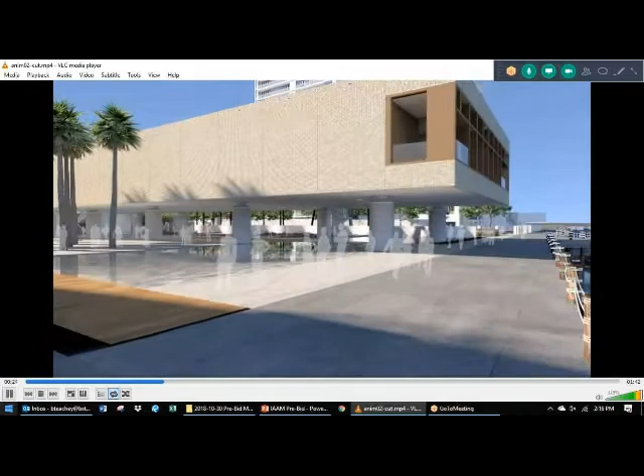You have the marina that's here. You're sitting upstairs right now in the Charleston Maritime Center. What you'll have is your basic walkway where we keep everything where it's at. A lot of the landscape is a little different from this animation, it changed just a little bit when we did the final permit drawing. But you're talking about your reflecting pools that are here as a walkway that goes in.

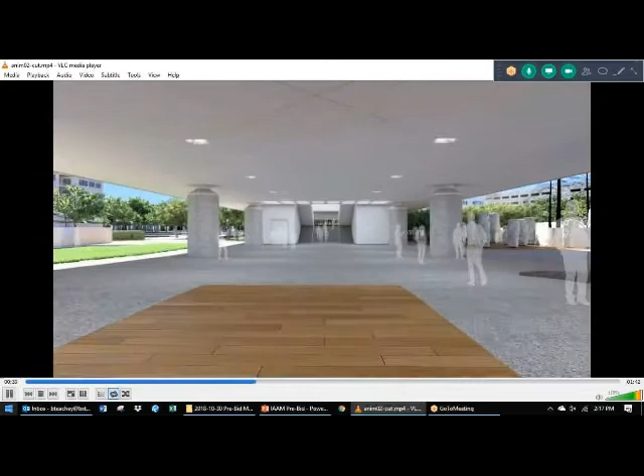Ignore a little bit of this wood bamboo, it's not down there - that changed a little bit from the animation. But your concrete finish, your tabby columns are out there.

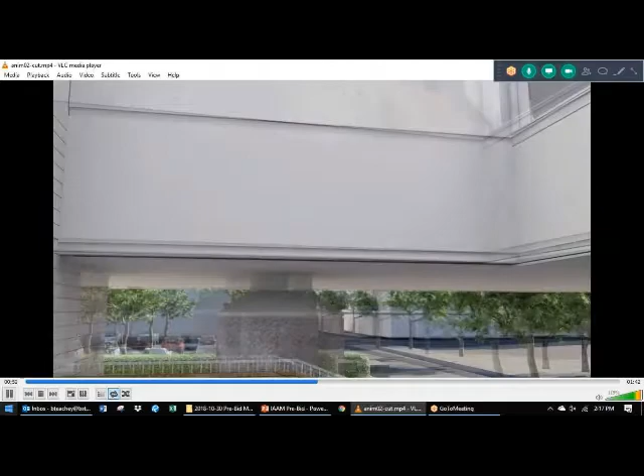So we're sitting on about, what are we, like 290 some piles? 292, that was off by 2. 292 piles. And then up here, we're on 18 columns that it sits on.

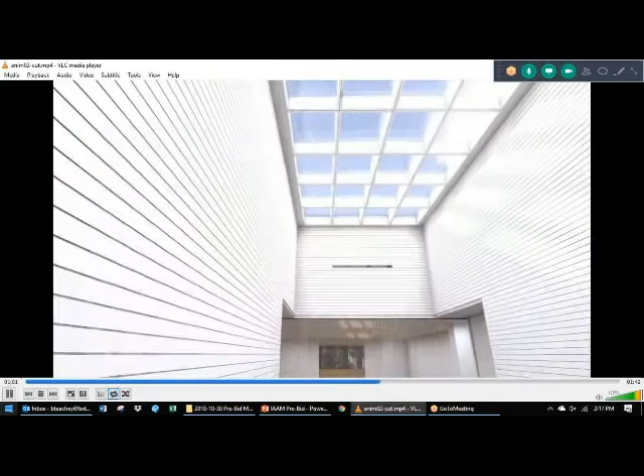It kind of goes up from level 0 into level 1, where you'll have your double rotating doors that go into the main lobby of the area. A lot of your wood all the way through here is in that entrance area as you come up. Then to show a little bit of the animation that comes back out, you see a little bit of the landscape on the sides.

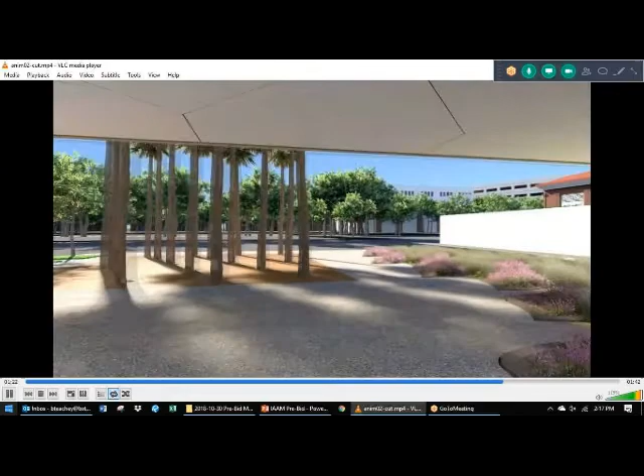And again, your concrete pavers come all the way out, right on back out to the street side. This has changed just a little bit, and I'm more than certain it'll probably change again. No designers in here, right?

So it'll probably change just a little bit again, but this gives you an idea of where it sits. You can see where we're going, what the project is, how it literally fits into the space, no less than like 80 feet from where we're sitting right now.

I think that's good. I was walking up and I kind of, you see that piece of land out there, and you said, man, this isn't big enough for what we have to build. But I promise you it is, but it's going to get kind of shoehorned in there. It's going to have a great view. It's going to be a tight fit.

That's also another good point - we understand we're working in a downtown environment, we have very limited space. So we're getting very inventive with a lot of our lean concepts to actually get the project to build, what we can do on site, lay down areas and things like that. So at your time of bid, when you send in your bid, keep that in mind of the space that we have and what you can do to help us maximize the space, and reflect that in your bid a little bit.

All right, look at that. It came right back up on the first try.

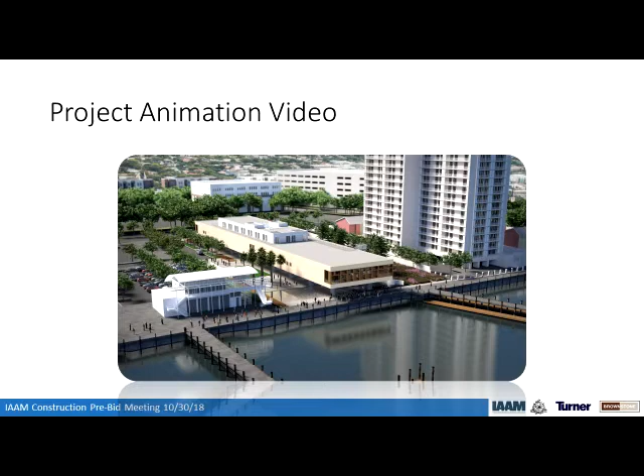So think of the second level as kind of your museum level. This is where all the magic happens, this is the main area. From our design meetings and a few of the presentations, the concept is kind of like what the aquarium is, where it's a 24-hour site. So you can come by here at night as a city property, and hopefully at night you can come through and walk, and kind of see it.

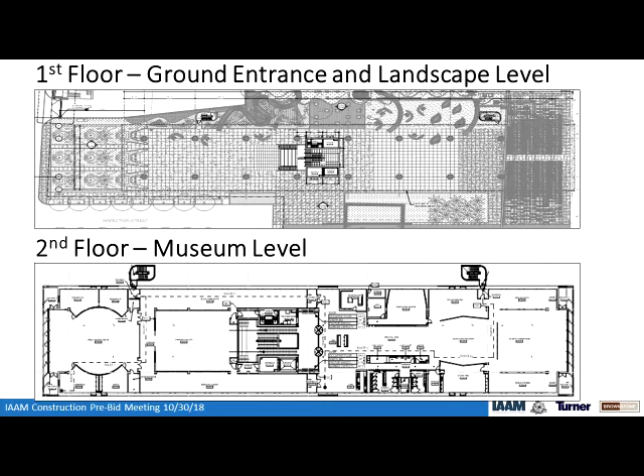But in order to get up to the second level or through the second level, you have to go through those doors, and that's where it remains locked at night. So the site basically is where you're walking in and able to see the area, kind of be a part of the project, even if you're not inside of it.

And then you keep going up to the third floor, that's the office level. So you have a lot of your office space, mechanical, where your electrical rooms are, some of your janitorial closets, elevator machine rooms, and then the big conference space is up here.

So that's basically a lot of where the administration is, and a lot of the behind the scenes stuff, kind of back of house. And then your last area is your roof area.

Up here is basically your main membrane roof, but the biggest important part is the skylight that's here in the middle. That's one of those big areas we're looking at to make sure we highlight. And then two of your stairs coming off the north side of the building that elevate down to where we're at. That's the main big piece of the building.

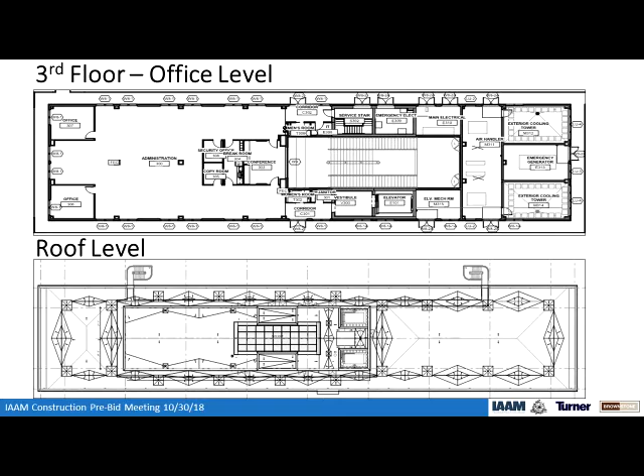And then I want to highlight some other pieces of the building. So on the exterior, you're looking at some of the main pieces. We pull this out because it's always a great functioning piece. On the outside of the building, you're talking all brick for the most part on that north and south side of the face of the entire building.

If you're building, I don't know any masons or concrete companies in here, nobody wants to identify, they're on our bid list. I know that. So that piece of understanding where the masonry brick goes is a huge component between that and the architectural wood as the biggest pieces of the museum that the architect wants to highlight, because it's the first thing you see, it's the flagship when you're coming into the project.

Specifically the color of the brick as well as the shape of the brick. It's a custom brick. If you're a mason, there's two bricks selected: one is a Danish brick, the other is a Carolina brick. They're both much thinner and longer in profile than a custom or standard brick. It's a much different brick, so make sure you pay attention to that.

These are key components we're trying to make sure it's just not your standard bid. And then like you saw in the video, coming down your walkway, on the columns, there's some tabby finish that's on there to kind of mimic a little bit of the seashell of Charleston. We have all these big pieces of it, and I think we have a couple samples we can actually give people at time of bid if you win, to help you out with that.

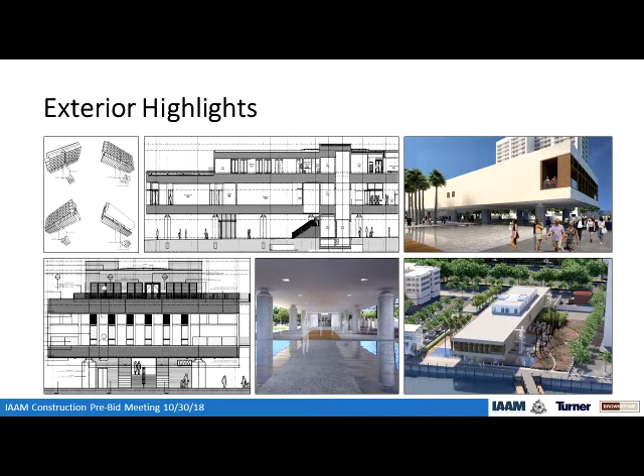Again, there's some signage that's going up here. On the opposite side, this is the south, this is the west side looking east. On the opposite side, there's some Philip Simmons gates specifically out there, where they have a couple of them going up, some of the wrought iron gates on the opposite side. So there's some key features called out as specialty features that we're going to need in the building for the project.

And the interior side of it. All right, so we talked a little bit about the museum space, all the way through the entire building.

Some of the key features pointed out were the stucco ceilings in here, a little bit of the painted stained wood cladding, like Dan had mentioned, a lot of the wood flooring and some of the walls, the metal studs, obvious with the gyp that's in there, toilet accessories, plumbing fixtures, kind of some of the standard things, roller shades, and then the skylights, what we mentioned up here at the very top. Very few companies can do that, and that's amazing.

That's one of those ones that are out there, and then the signage that's in the building—a lot of your wayfinding, a lot of the things that are there. It's part of the project. It's big. We want to make sure we highlight it because those will be parts that when you bid it, we want you to call some of those items out specifically in your bid because they're obvious on the project.

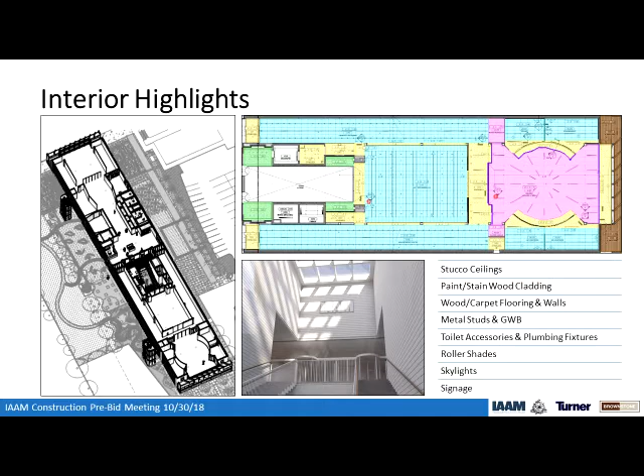So the big construction timeline—I'm gonna let you grab this one. Absolutely, I wrote some notes down here to help myself with where we're at. This is exciting for us because Bobby and I came down and interviewed for this job almost a year ago. So we're excited to get moving here and really get this job underway and under construction.

So we launched the bids 10/22, hopefully you all received it. We launched it through Building Connected, that's the platform where we're issuing the documents, drawings, and specifications. We'll go through all that later in the presentation, as well as a bid manual. The bid manual is where we house everything you need to know as it relates to how to bid the job—everything from a project-specific safety manual all the way down to our lean practices, as well as our practices for the schedule or logistics plan. Make sure you get that information.

If you have questions or comments or can't find anything, some of you have already been communicating with David Floyd, and that's why we wanted him here today. Easy, quick questions we'll answer today. If it's a more in-depth question, we would ask you to put it in writing and send it in as an RFI. We plan on issuing addenda number 1 with some more information. We always like to issue planned addenda, so we schedule them so you don't get information on day 1, day 2, day 3, and then it's just information overload and you stop looking at it.

So we're going to have two planned addenda. The first one is 11/2, this Friday—you'll get some more information. A couple of scopes of work that we had to develop further because there was some confusion, I want to say it was security and communications, some of the low voltage stuff. So if you're looking for those, they'll be coming out this Friday. Addenda number 2 will be next Friday, 11/9. Hopefully that'll be all the RFIs that this room develops, as well as all the other bidders. Send those off to the architect, the architect can answer the questions, and then we can issue that group of RFIs and the other pertinent information to you following. That'll be on 11/9.

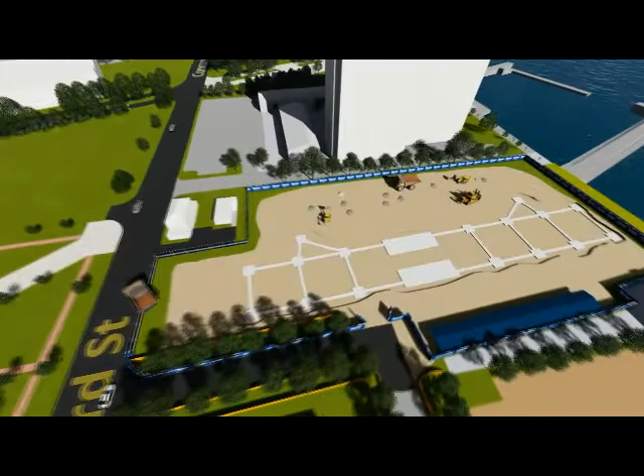To go over a little bit of the logistics, again, the site's tight. We're sitting on a very small site, so we're always thinking of hours of operation. The city's always letting us go from 7 to 7. We're trying to get some variances in there so we can get a little bit more time.

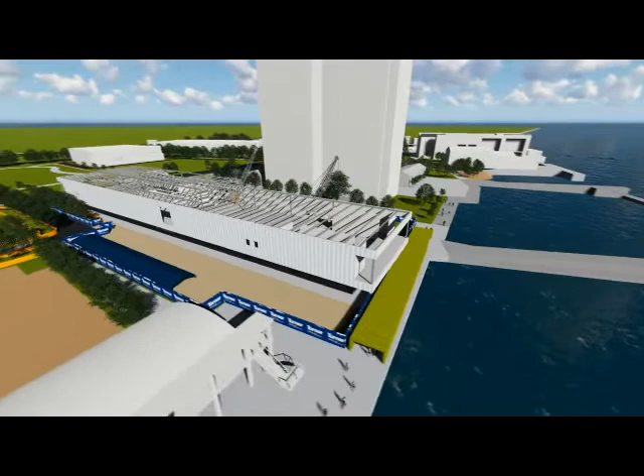It's a typical downtown project. We have residents on that side, the Dockside Condominiums, and then tourism going on this side. So a lot of what we're thinking about is being a good neighbor. We understand completely when we're driving piles, if you've ever been around piles, it's a pretty consistent nuisance.

So it's that piece of understanding that everything we do out here, we're affecting somebody. Beyond just thinking about the project and what we need to do to build it, what are we doing to the people around? We're always keeping the community in the know. So when you jump onto the project, if you're fortunate to be a part of it, you will be giving updates to the community to let them know where the project is, what we'll be doing in the next month, two months, looking ahead.

That way we can help them schedule a lot of the things we're doing. Talking a little bit about material delivery, you can see, Concord Street, and where we're coming out. So the truck route, this up here is the aquarium.

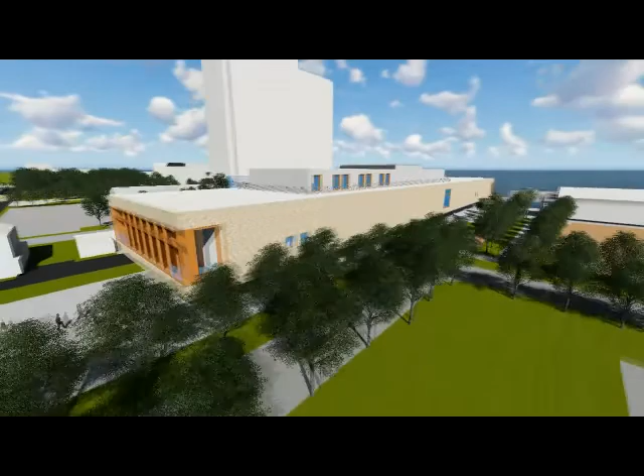You're talking about Dockside Condominiums, and then Wharfside Street right here. We understand completely that this is a tight site. So when you're coming through with your materials, regardless if it's steel, piles, or just a 53-foot bed truck, we have to think about how we're getting it in here. This is always the piece we're looking at: if you're coming off 26 or coming over 526, how will you get your material to the site?

We'll work on some of that once we get the logistics in place and figure out how we can get some of those things sorted. And as always, we're always talking about a clean site at all times. That's something we're always trying to push out there.

So the logistics piece of it is huge. We're going through a lot of planning with the city. Right now we're trying to get things like streets shut down for us, what times we can pump concrete, and so on. Afterwards, we were in that transportation and traffic meeting.

Somebody asked, can we park on Cannon? Will you allow people to park on Concord Street over here in front of the aquarium? Let you know now, we will tow cars - Turnkey Towing or whatever it is around here. It's that piece where the city has told us we cannot stop the street. We can't hold up traffic, especially when they have a big festival or something that day.

It's being a good neighbor about that piece of it, so definitely have to think about that. We're working on ways to get parking and how we can get creative in some of those areas, and we're trying to free up some parking for some of the guys now.

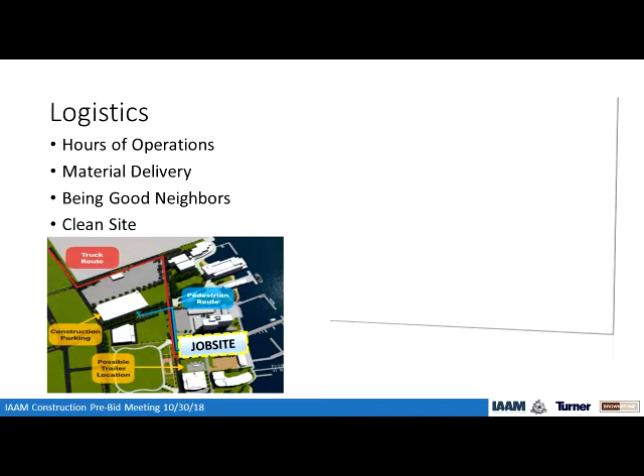So this is a quick list, it's on the handout that we handed out today. There should be a scope of work, additional provisions put out for each and every one of these. Please pull it down and read every line of it. They are not generic, they are specific to this job, as well as pay attention to the addenda.

It's common for us to get more information from the bidding process and from RFIs, revise the scope of work, and issue it in either addenda 1 or 2, so please pay attention to that. We will make every effort to give you a cover page when the addenda comes out that says these are the documents that have changed, whether it's drawings, specs, or scopes of work, so that you're clear what the addenda actually represents and you don't miss something. But please pay attention to them.

There were a couple missing, as I noted, there might be a couple more that we break out. So this was an effort to get the drawings out there so that folks could start turning it. It's a little bit longer of a bid period than you've probably normally seen - we give you 4 weeks, so from the day we put the drawings out to the day we're taking bids is 4 weeks. Normally we would give 3 weeks.

We wanted to make sure there was clear communication as well as generate as much interest as possible, so we'll have more time for allowing questions and answers.

On the instruction to bidders, there's a list of submittals you turn in with your bid. First is a bid form. Second is the scope of work that describes your package, which we'd like turned in and initialed as well. Then a couple of participation forms go as well. There's four documents to turn in, and those are all on the website.

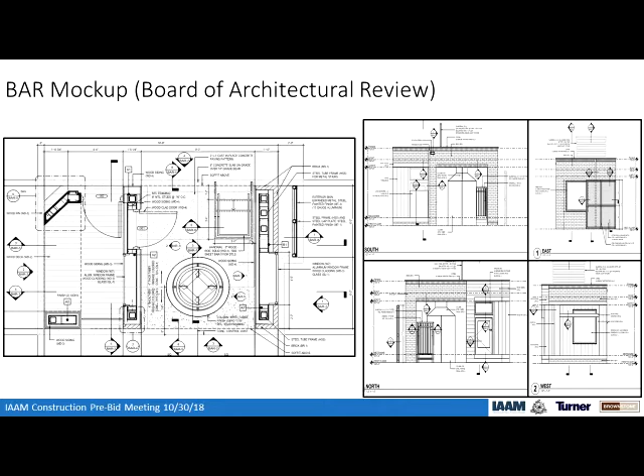To kind of talk a little bit about some of our additional provisions that are in the packet as well. You guys want to touch on it, or...? Yeah, I think the next one kind of covers it. Yes, the bid manual for the most part—yeah, pretty much the same stuff.

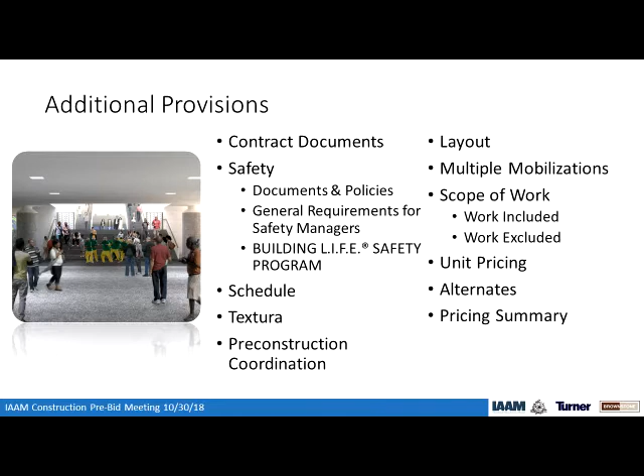This is what I was talking about with the bid manual, really. You've got the drawings, you've got specs, and then you've got everything else—so we put everything else into this bid manual, and this is how we're going to run the job, the invitation, instructions to bidders. I don't need to read all these for you; there's a table of contents in the bid manual. Make sure you read and acknowledge each one of these, because this will be part of your contract. Your contract will consist of the base form of agreement, the additional provisions, which is the scope of work that you're going to bid, and then the bid manual. All of these documents are going to be made part of your contract. So please read it and make sure you know what it says and what it entails, or what you're signing your company up for when you get a contract.

And just to point out, we can touch on all these in question and answer too, when we get to that part if people have questions. I'll point out the advanced payment program in there as well—somebody always asks, can't wait net 45, can't wait net 60 to get paid. It's in the bid manual, so if you've got questions about it, we can definitely talk about it and see what we can do. And I'll touch on it.

Okay, yeah, the advanced payment plan is this. A normal payment process is that you would submit your payment application to the general contractor on or about the 25th of the month. We would then submit it to the owner on the 30th of the month. Somewhere around 30 days later, the owner would pay us, and then the general contractor would pay the subcontractor potentially 7 to 15 days later. That's a total 45-day pay period.

We're going to throw all that out the window and say you're going to submit your pay application to us. After the owner approves the payment application, we're going to pay you within 5 days of it, regardless of whether we get our money from the owner. So we're going to take the risk as the general contractor—Turner Brownstone is absorbing that risk for those 45 days, and we're going to pay our subcontractors in 5 days. Read the program, you have to sign up for it. You're not automatically in the program, so go in, read it, understand it, and if you like it, then you can click the button when you're getting ready to get paid and be in the program.

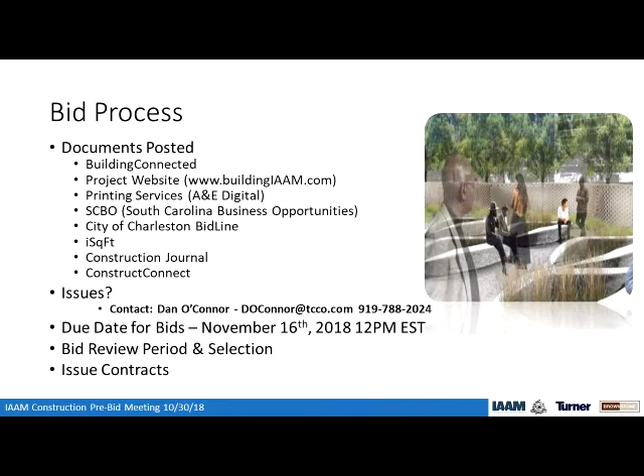So on this project, as we mentioned earlier, we're working with the City of Charleston, and this is a minority, women-owned business enterprise where our percentages that we're counting has to go through and be certified through the City of Charleston. We have here today Ms. Ruth Jordan, which I always love, make sure you guys meet and get to know her and understand, let's say it again, you've got to be certified through the City of Charleston.

Does that mean if today, like she mentioned earlier, if you're not certified today but you still want to submit your bid, yes, submit your bid, you can still be certified through the process. We will identify you. If you already have certification through SCDOT, this county, or some other state like North Carolina's DBE system, submit that certification with your bid. We'll get it to Ms. Ruth, or you can reach out to her yourself, and we'll still get that certification going. We don't want anybody to be held back from it, but we do want to count those dollars. It's highly important that we identify and are able to give those opportunities, because that is a big piece of the selection process.

This is a good piece to explain. So even though if you're a minority women-owned business and cannot get a prime contract, that means we give you the direct drywall contract, that doesn't mean everybody else who bid doesn't have an opportunity as well. We're also looking at second tier, third tier, suppliers, vendors, anybody to have opportunities on the project. If you want to be part of it, we want to connect you with the prime contractor who got the first tier contract and offer those opportunities to them as well.

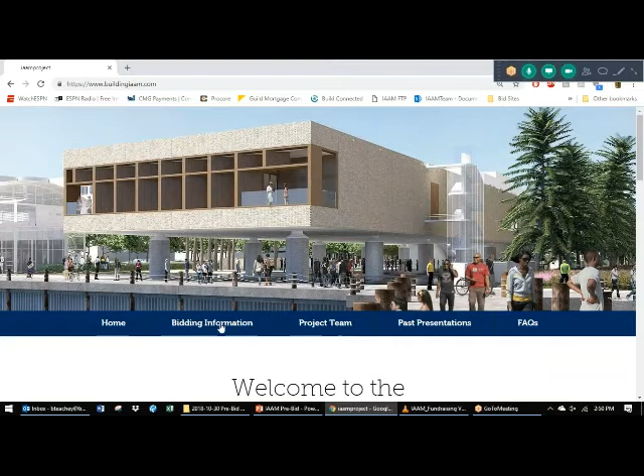It's pretty simple, just buildingIAAM.com. I'll also be posting the presentation for today on the homepage tomorrow. Our bidding information page will have all the information you guys will want to check out, so I'll have all the bid packages, the Building Connected and AE Digital website links, along with all the certification links you'll need. That'll all be on there, and I update it pretty often.

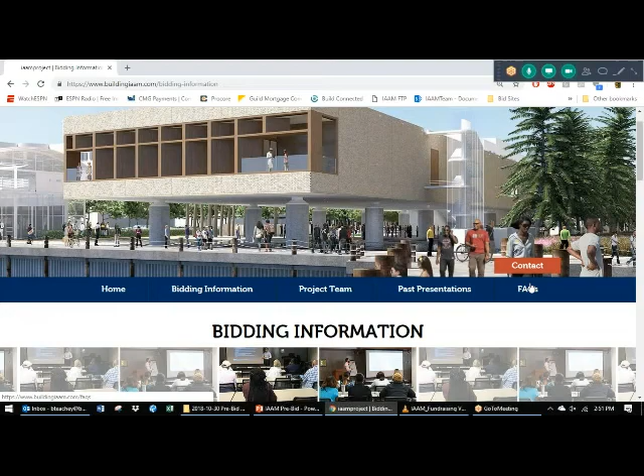We also have a section for FAQs and contact. So if you guys have any questions you don't get to ask today, or that you'd like to ask, you can submit it on the website, and that email will go directly to me, and I will forward it along to who it needs to go to.

Thank you. So the website is live, it's up and running. If you haven't had a chance, you can jump on your phone right now and take a look at it. We're going to keep it pretty active and pretty live through the project, so you'll get project updates, and that'll be our way to communicate as well.

So we're talking everything from bid announcements, which you'll see all that information on there, to project updates. We're even thinking about putting a little bit of our safety documents up there, like our SDS sheets, and any kind of trainings that we might lead.

We're working right now on getting a live webcam once we get the site up and going. Again, it's that piece of connecting to the community, keeping project timelines, letting you know where maybe the MWBE dollars are at, what contractors do we have. Whoever wins the prime contract, we'll probably put your information, at least a logo and contact information, because we want to connect everybody in the community to you being the prime contractor for whatever that scope of work is. So we're going to keep the website pretty live and up to date for everybody.

And the last thing we like to do is additional outreach. So November 7th at the Brownstone office, between 10 a.m. and 2 p.m., if you want assistance with your bid—we're not talking about coming in and doing a takeoff for you or anything like that, promise you we're not going to do that.